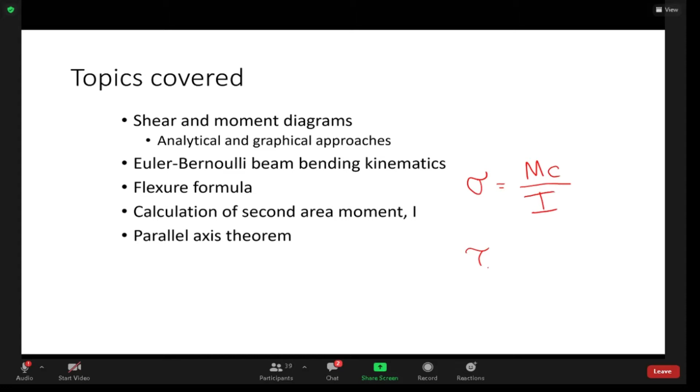TC on J. So M is the relevant internal quantity, the internal bending moment that we need. C is the distance to the point in question, much like the radial distance. And we're going to have a different geometric factor, I, which is a lot like J, but it's just in

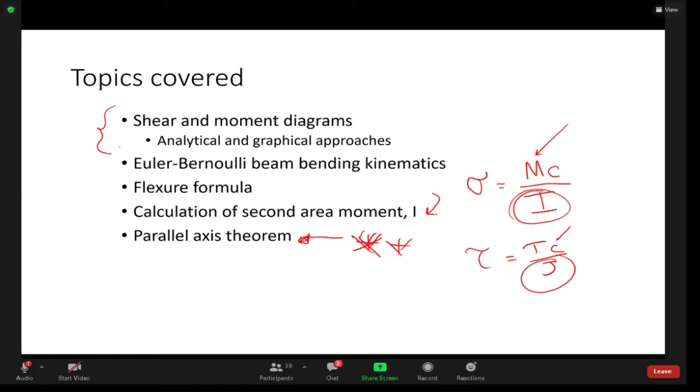rectangular coordinates, not polar coordinates, okay? So we'll talk about that. We'll talk about calculating I. It gets a little trickier because we have built up sections, and we'll talk about one of these big tricks that we use actually for a lot of things, this parallel axis theorem. But today we're going to focus on these, because if you can't do that, it's going to be hard to do the rest of the chapter. So this is pretty quick, although again, you've seen most of this.

So let's talk about what the book has established as the positive sign conventions. We do need to stick with this because this is how the solutions in Mastering are going, and most textbooks do it this way. There are a couple that flip the sign convention for V, but this is what the text does here.

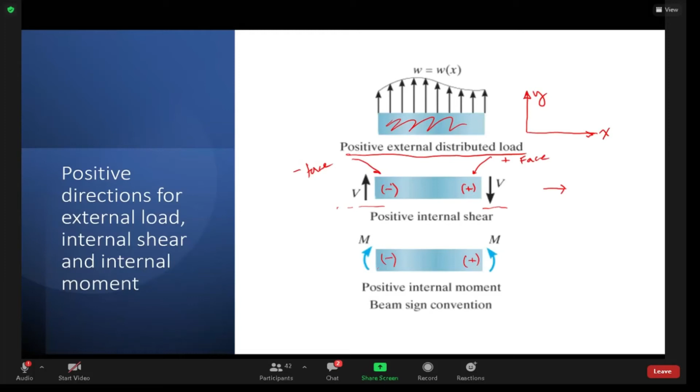All right, so let's do a simple problem here. So here's problem 6.1, this is actually a homework problem for y'all. And we're going to do this problem twice: first the analytical approach, and then we'll do it with the graphical approach. I hope I can do it all on the slide here. I'll try to be neat and get it to work out.

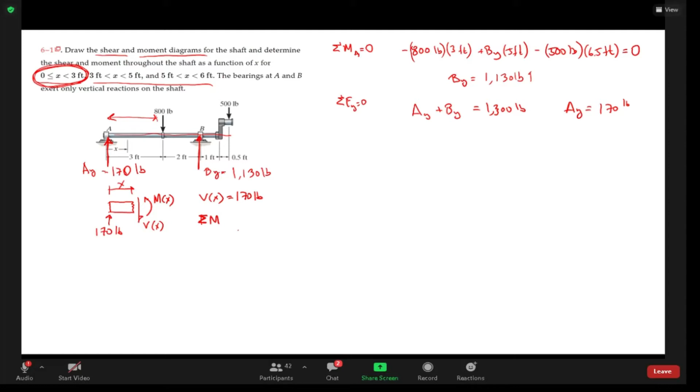And then if we do the sum of moments, let's do sum of moments around point A, let's say. Well no, let's do it around X. Let's do sum of moments at point X, at point X equal to 0. That's going to give us, okay, we have the 170 pound force, that's going to give me a clockwise moment, so it's minus 170 pounds, and its moment arm is X feet.

Now it's always a little tricky about whether to put the feet in there or not, but if you put in for X as feet, fine, so that's what it is. So I have X, and then we also have, we can't forget the external moment, the internal reaction moment that's applying on the free body diagram, and that's positive, so that's plus m of X, and that's going to equal 0. So that gives me that m of X equals 170 times X, and that's in pounds. So again, this is only between X of from 0 to 3 feet.

So if we were to plot this, I'm going to plot V here. So here is V of X, and here I'm going to plot M of X. Obviously this is X. So V of X, at least between 0 and 3 feet, I'm going to put the points here. It's just a constant positive 170 pounds, okay, so that's what it is, right? That's 170 pounds.

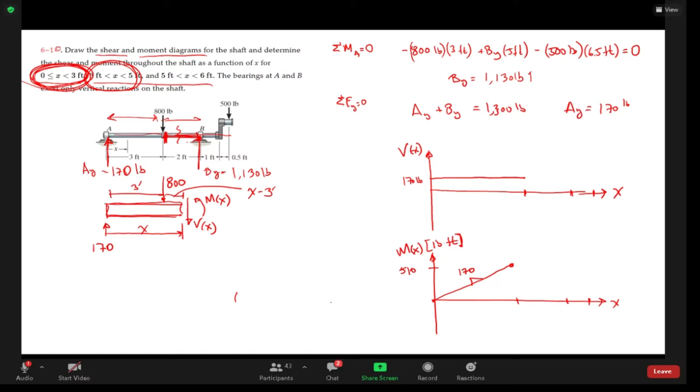Okay, so we can do sum of forces in the y direction, and we get 170 minus 800 minus v equals 0, or v of x is going to be 170 minus 800, correct? Yeah, 170 minus 800, which is going to be minus 630.

All right, so that means the shear force is actually acting up. So it's a minus, and it's constant from this whole section. So for this region here, it's going to be minus 630. So here we are, we got a positive shear in this region, and then we jump down to this negative shear.

All right, now we want to get the moment. So to get the moment, we'll do sum of moments around the cut point. That makes it easier, so I don't have to deal with V, but you could do it in terms of V.

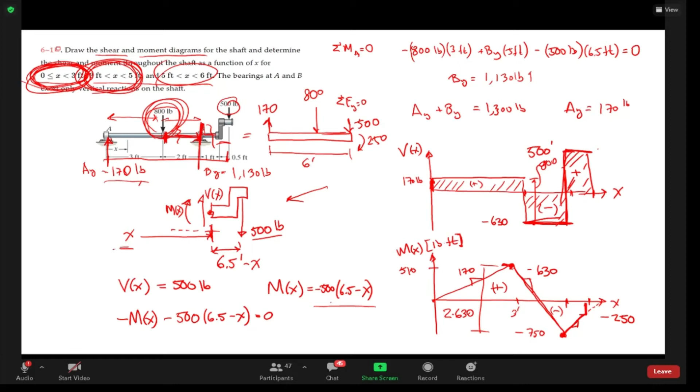And then between here and the 500, how much do you think that jump is going to be? This jump here is going to be exactly the same as the point force applied at B. That's the jump at B. So it better be 1130. So let's just check. So if we had 500 to 630, yeah, it's 1130. So that checks out. So the shear diagram is going to jump depending upon what the point forces are.

And then when we get to the very end, there's a 500-pound force, so it jumps back down.

Likewise, with the bending moment diagram, it's the same thing. There is no external moment at A, so we start off right at 0. There are no point moments applied anywhere, so everything is continuous until we get to the very end here at x equal to 6 feet. And we didn't quite hit 0, but that's because there is an external applied moment of 250 pound-feet due to the fact that we moved the 500-pound force statically out to that point, that 6 foot mark.

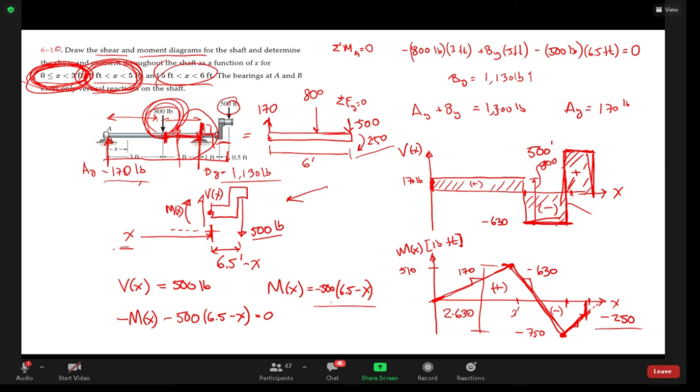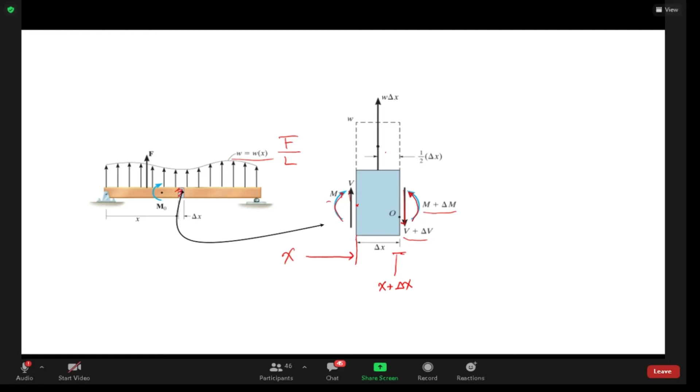So on this face at X, the moments are simply M and V. Now if we move out a little bit by delta X to the point X plus delta X, the shear and moment will change a little bit, given by a change of delta V and delta M over that differential segment delta X. We also have the distributed load, which they've simplified by just assuming, since we're going to let delta X go to 0, that it takes W times delta X as the value. Really there's actually a curve, but we're taking delta X to 0.

All right, so if we do sum of forces in the y direction, what do we get? V plus W times delta X minus V minus delta V equals 0. So the V's cancel out, and here I can just rearrange this. I can get delta V equals W times delta X, or dV/dx equals W of X.

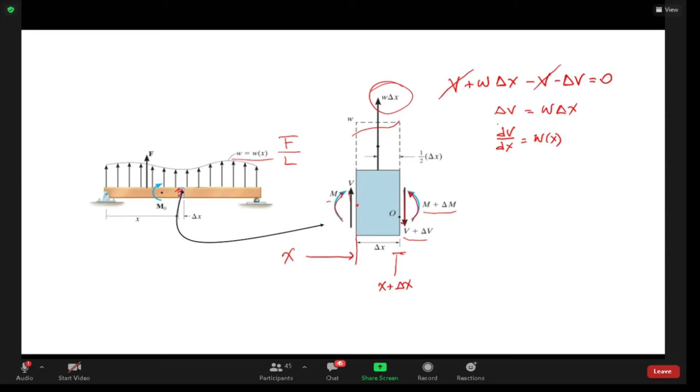As we take the limit as delta X goes to 0, this is telling me that the slope of the shear curve equals the value of the distributed load at that point. Also, you could have integrated that and gotten delta V equals the integral of W of X times dx. That means from one point to another, the shear will change by the integral of that distributed curve, or the area under that curve. So these are the same relationships.

All right, so let's look at sum of moments around O. If I do that on this face, I get minus M, that's a negative moment, minus V times delta X, because this force V has a moment arm of delta X around point O. And then the distributed force is also going to give me a negative moment, minus W delta X, that's the value of the force, and its moment arm is 1/2 delta X. Then the shear force V plus delta V doesn't do anything at O, but we have the positive moment of M plus delta M. And all that is going to equal 0.

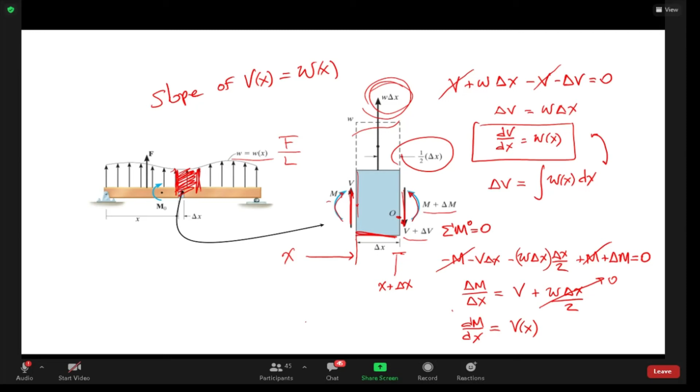So again, the M's cancel out, and we can rearrange this to get delta M over delta X. You probably can imagine where this is going: that's going to equal V, plus W delta X over 2 — it was delta X squared, but I divided by delta X. Then if we take the limit as delta X goes to 0, we get dM/dx equals V of X, and this other term goes to 0 because delta X goes to 0. So here we get something that looks very similar, and we can also write this in its integral form: delta M equals the integral of V of X.

All right, so what does this mean? Well, this means if I have a shear diagram, if I know the shear, the value of the shear at point X has to equal the slope of the moment curve. Or likewise, if I wanted to figure out how much the moment changes from one point to another, all I have to do is integrate the shear curve between those two points. So this is graphical because we're not going to really do the integrals formally or the derivatives formally. We're just going to recognize that the derivative is the slope and the integral is the area under the curve.

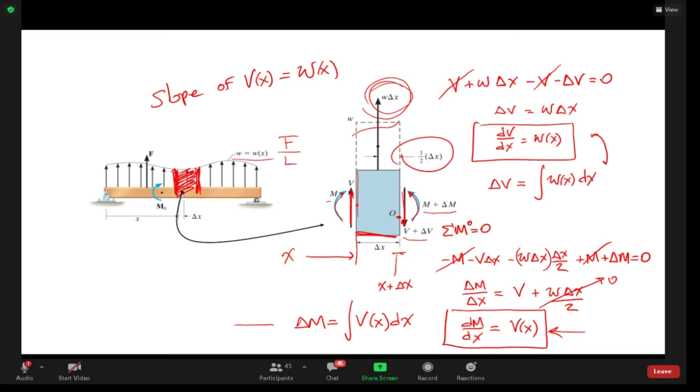So let's look at this. Here's an example the book does, pretty good, right? Here's a distributed curve. It has some shape. It's not quite constant or linear. Maybe it's a quadratic, maybe it's a hyperbolic sine, I don't know. But this is the curve W of X.

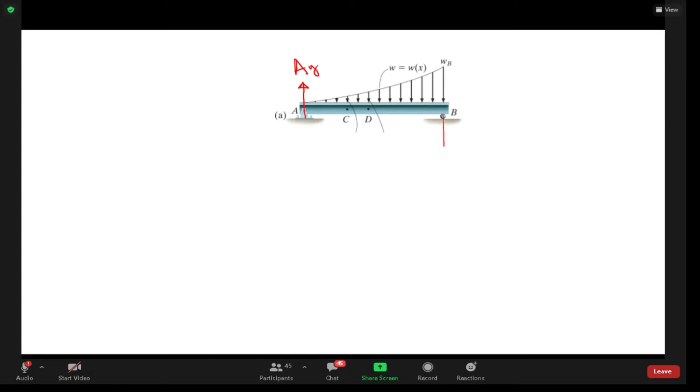So if we want to construct the shear diagram, well, the first thing we're going to do, before I go up, is figure out the sum of forces in the Y and the sum of moments. And this is going to give me the reaction force here, A of Y, and then the reaction force here of B of Y. So we can calculate that from the equations of static equilibrium.

And here we can graphically construct the shear curve. So at X equal to 0, we know if you were to just consider a cut just ever so slightly over from point A, you would have AY acting up. The positive sense for the shear is down. I'm going to let this distance here go to 0, like in the limit, but clearly here you can see V of X has to equal AY at X equal to 0. And so we're going to start off here at AY.

Also, we know that the distributed force here is 0. At this point, W of X equals 0. So from here, we know that the slope of the shear curve has to also be 0.

Now, the shear force, the external force here is down. So this is negative, right? It's negative, that's in the negative direction. So again, at each one of these points, you could figure out the slope of the shear curve by figuring out what is the value here and here.

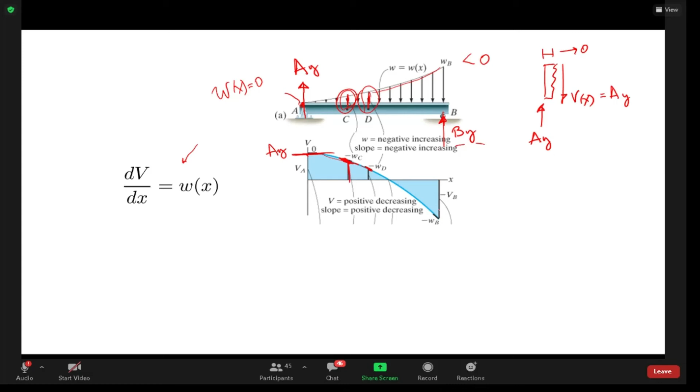Now at point B, we have BY, and it's going to jump up by the same amount to BY. So this value here is going to be minus BY. I don't know all the details about like what all the numbers are between here and here, and I don't know exactly where this goes to 0, but I've got at least the general shape of the shear diagram, and I know the values at the ends.

So you can do that relatively quickly. I mean, I don't know what they are, but let's say this is 300 pounds and this is 500 pounds. So that means the shear diagram is going to start off here at 300 with a slope of 0 and then kick down to a slope down to here where it's going to be minus 500. And you can draw the approximate shape here. So you really don't need any equations.

Okay, so now that we have a shear diagram, we can get the moment. So, we know that there's no external moment here at point A, so the moment curve is going to start off at 0. It's going to have a slope equal to the value of the shear curve. We know the value of the shear curve here is that support force, so we start there. And since the value of V keeps decreasing, this slope is going to decrease. So it's concave down.

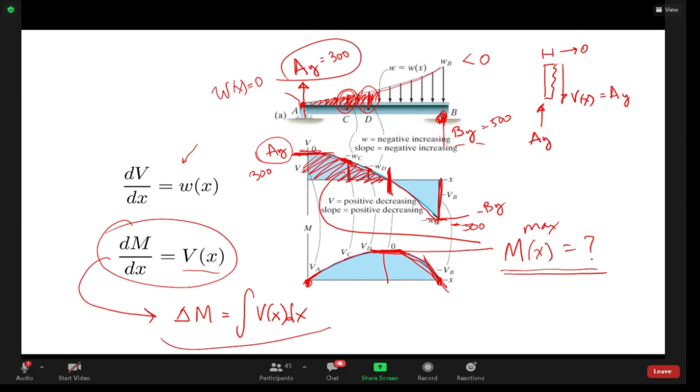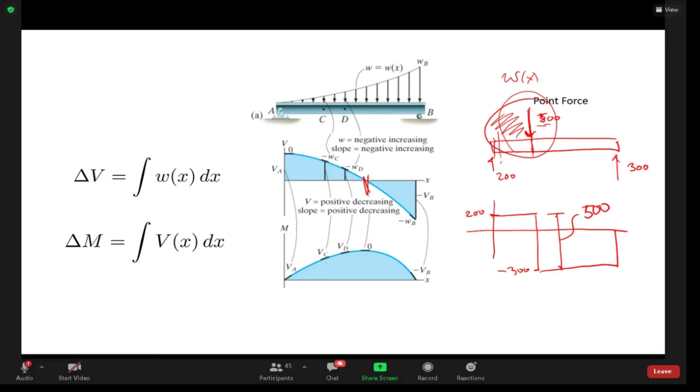So using those things - area under the curve, the slope relationships, also trying to figure out where these zero crossing points are - this allows us to sketch these things out with a good degree of accuracy, without having to resort to all those equations.

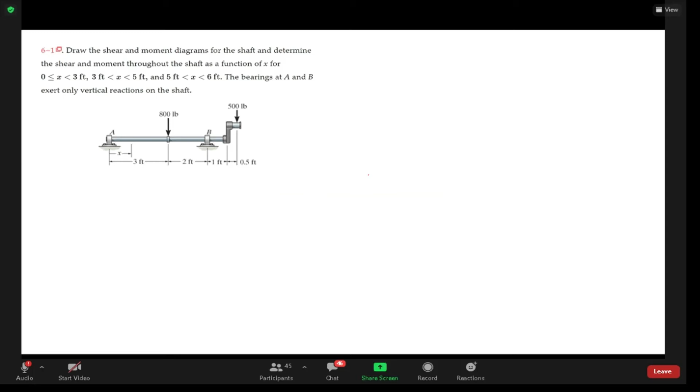So let's do this again for the same problem we just did. You still have to calculate the support forces - we knew that already. So this is 170 pounds, and up here we have 1,130 pounds. We already figured that out from sum of forces and sum of moments on the total diagram.

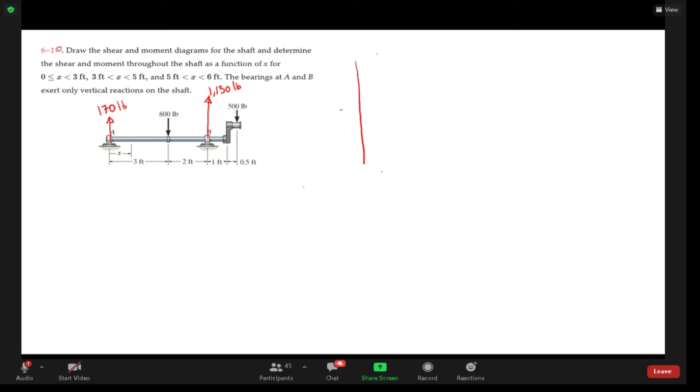Let's construct the shear diagram from here. So here we're going to construct V of X, and this is X, and let's see if we can draw this reasonably well. Here is at 3 feet, then here is 5 feet, and finally at 6 feet, right out to this point.

If we look at a free body diagram just a little bit, in the limit as it goes right to point A, we can see that the shear diagram has to start off at a positive 170. Now between A and 3 feet, W of X is equal to 0, so the slope dV/dx is also equal to 0 because it's equal to W of X. So we're going to just go straight line over to here, which is what we got before.

Now we hit 800. Once we integrate past the 800, that means it drops down by that 800. So we're going to go from 170 down by 800, so that is down to minus 630.

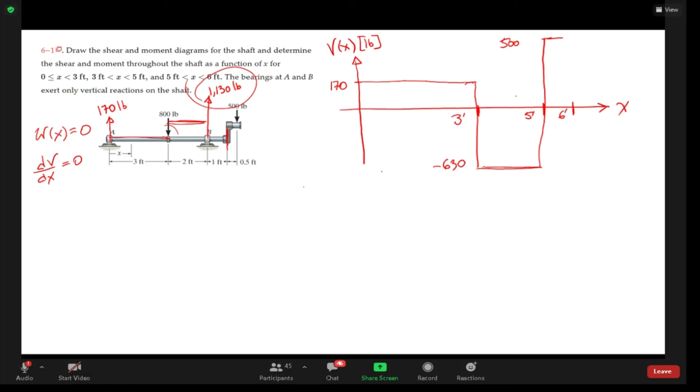Now, how do we know which is a positive jump or a negative jump? That can be a little confusing. The way I think of it is, let's just look at it just barely over from where we put, here's the 1130. We're going to let this distance here, dx, go to 0. So this is a positive face, so the positive value of v is going down. If you do sum of forces here, this has to equal the 1130, so it's a positive jump. If v were going the other direction, it would be a negative jump. I guess you could remember that too, but I always forget those things, so I just draw the little free body diagram to show me whether it's positive or negative.

So there you go, that's the same shear diagram we got before. So now we got the shear diagram, let's figure out the moment diagram. So here we're going to draw the moment diagram, m of x, and it's going to have units of pound feet. So again, we're out here at 3 feet, 5 feet, and then 6 feet.

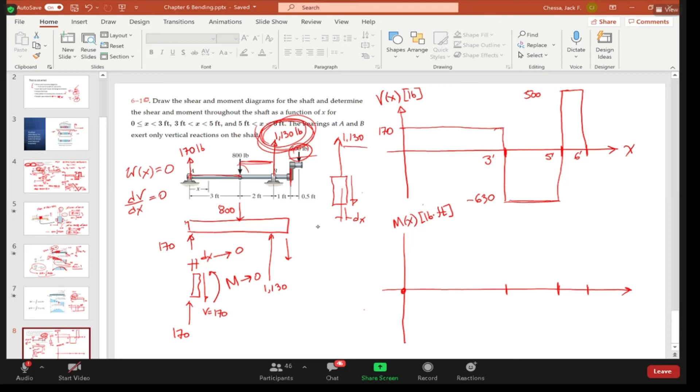All right, so what was I saying? Yeah, so we're back here. We got 500 feet, 500 pounds acting down, but since we moved it a half a foot, that means that we need to apply the moment here of 250 pound-feet. So that means that that's actually a moment that's applied, that's an external moment.

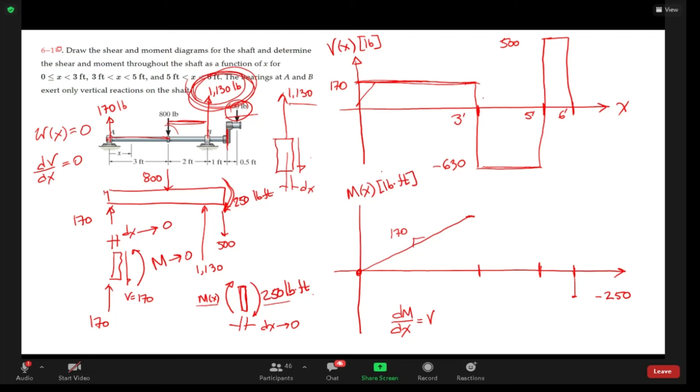All right, so the slope of the moment curve is equal to the shear curve. So the value here is 170, so that means the slope is going to be constant and positive 170. The value here has to be the area under this curve, because we know that the change in the moment is equal to the integral of v dx. So this area here is 170 times 3.

So that's 510. Sounds familiar. Its units are going to be pound feet, because it's 3 feet times 170. And that should also be this, right? If you think about it, that's 170 times 3, also 510. So we go up here to 510. Now we're going to have a negative slope of 630.

It's going to jump down by this amount here. So this amount is minus 630 times 2 feet, or that is negative 1260, right? So 510 minus 1260 gives me the minus 750, which is what we had before.

And even if we wanted to, we could figure out where this zero crossing point is. Not that it really matters, but you could figure that out by the geometry here, starting at 510. If you go at a slope of negative 630, how far till you drop by 510? So this distance here would be 510 over 630. Right? So that would give you that distance.

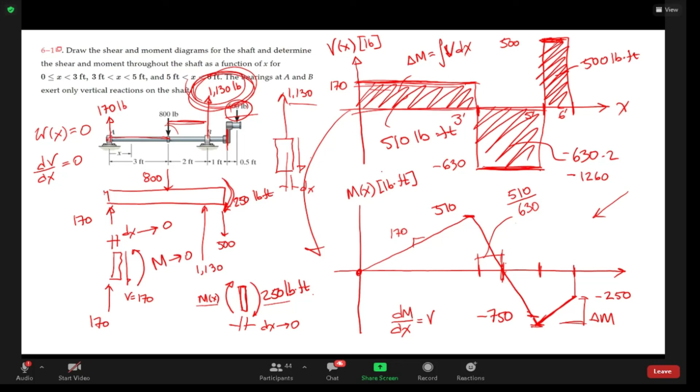Basically, the next thing that we would cover is the flexure formula stuff, but I only have like 10 minutes, so I think we'll stop here. That was basically what I wanted to go over today anyway. I don't know, any questions on this material or on anything else?